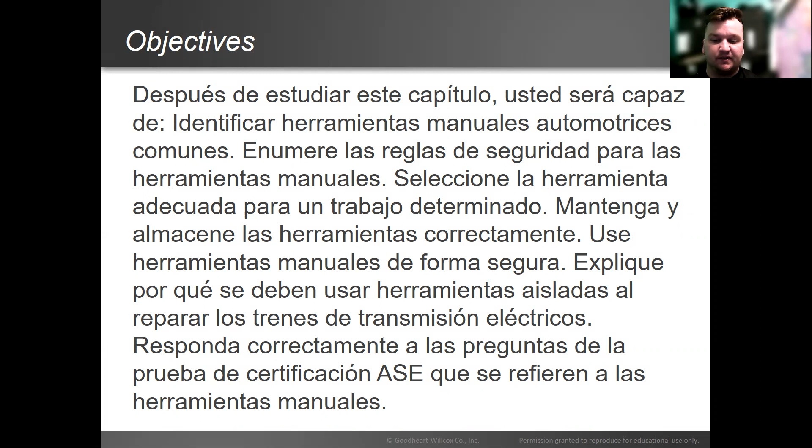So, some tool rules are to purchase quality tools, keep your tools organized, keep tools clean, and use the right tool for the job. You want to purchase quality tools because you don't want any tools to break while you're trying to use them. If they do, you run the risk of hurting yourself or damaging the parts or the vehicle you're working on.

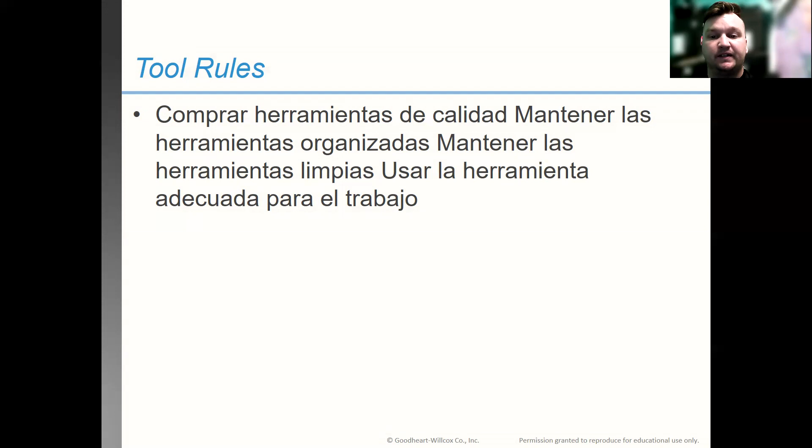You want to keep them organized so you're not tripping and falling over them when they're on the floor, and you don't want them in your pocket so they don't stick into you and injure you. Keep them clean so they're not greasy, so your hand doesn't slip off and you injure your hand. And use the right tool for the job so you're not damaging the things around you or possibly injuring yourself because you're using the improper tool.

All right, tool storage. A toolbox stores and protects tools not in use. There are 3 basic parts: a large roll-around cabinet, an upper tool chest, and a small carrying tray, so you can carry it around the shop.

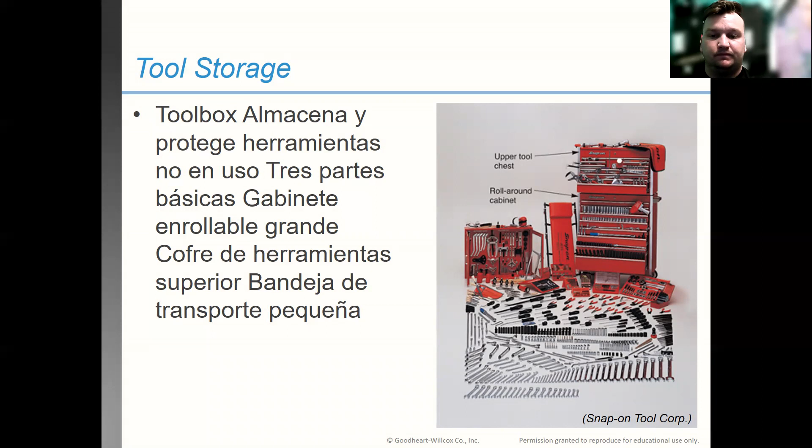Toolbox organization. Keep related tools in the same drawer. Do not keep small, delicate tools with heavy ones. You don't want your small tools getting damaged because a heavy tool crashed into it and broke it. And tool holders help organize small tools and provide portability. You're not always going to be working around your toolbox, so you might have to take the organizer where you're going, so you can be a little bit mobile inside the shop.

Wrenches are used to install and remove nuts and bolts. Wrench size is the measurement across the wrench jaws, stamped on the side of the wrench. It can be conventional, which is in inches, or metric, which is millimeters. Some conventional sizes do cross with metric, but not all of them. So don't think that you can use one or the other. You have to use that specific size for the bolt or nut.

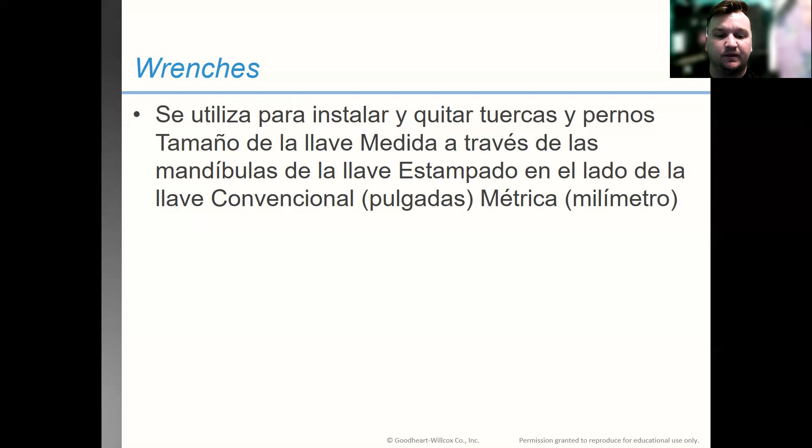All right, wrench safety. Always select the correct size. Never hammer on wrenches. When possible, pull, don't push. Never use a steel bar or pipe to increase leverage. So, again, use the right tool for the right job. You don't want to use the wrong size. You can slip off and injure yourself.

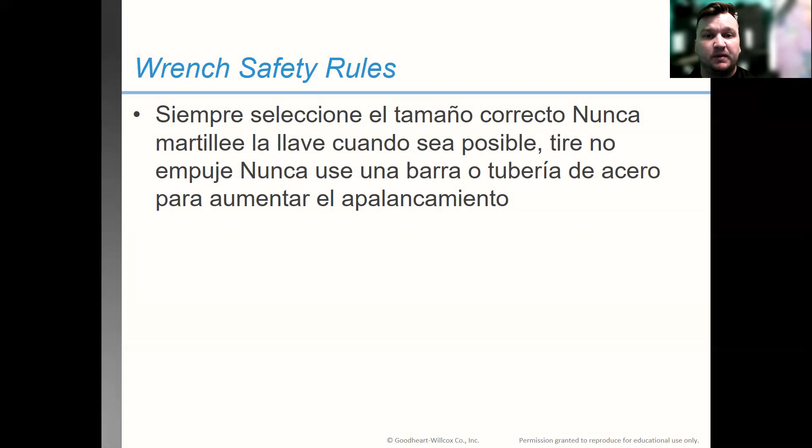You want to pull a wrench to you. Not every time you'll be able to, but try to make sure you're pulling it towards you. If you're pushing a wrench, when the bolt or nut breaks loose, you run the risk of hitting your hand on something and cutting yourself. And you don't want to use a pipe or a bar on a wrench to increase leverage. You run the risk of it slipping off or breaking that wrench.

All right, there's a few different types of wrenches. You have open end wrenches, which is the top picture there. You have box end wrenches, second from the top; you can see how it's fully enclosed. You have the combination wrench, a combination of the open end and the box end. You have a tubing or line wrench, also known as a flare nut wrench. It's almost a box end, but has a little cutout.

Brake line fittings have a line that runs through the fitting, so you have to get the wrench around the line. It has a cutout so the brake line or fuel line can go through it, but you still have the optimum amount of surface on the fitting to break it loose and keep it from rounding off. Those fittings are pretty soft and round off very easily, so you want as much surface area on that fitting as possible, and it fits very snugly.

And then you have your ratcheting wrench. This has a ratcheting mechanism on the box end, so that you can fit into tight spaces, and it kind of speeds up some work.

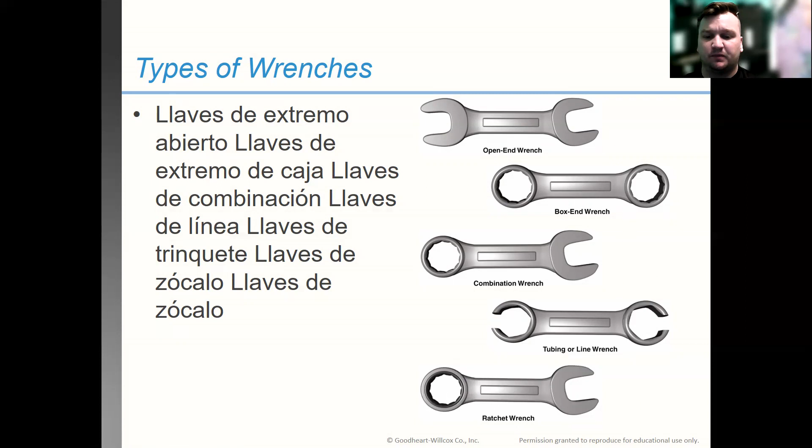All right, sockets, socket wrenches. Sockets are cylinder shaped. They're used to remove or install nuts and bolts. There's 4 different drive sizes and 4 different points. So if you look up here, you have your 4-point, and it's just how many corners there are.

So this is the side, whatever points it is, that's the side that's going to fit on the nut or the bolt. And you have 4-point, you have 8-point. You have a 6-point, you see 1, 2, 3, 4, 5, 6, and you have a 12-point all the way around. You want it to have as many points as the bolt that you're trying to take off. Now you can get away with a 6-point bolt and using the 12-point, but you can't use a 6-point socket on the 12-point bolt. So it only works one way.

Now the square side over here, these are called your drive sizes. This is what goes on the socket. So the smallest is a 1/4 inch. The next size up is your 3/8 inch. And then the next size up from that is a 1/2 inch. Those are your 3 most common sizes you're going to use, your 1/4 inch, 3/8, and 1/2 inch. Your 3/8 is going to be the most common one that you use.

You'll go up in sizes if you need more strength. If you have to put more torque on it, you'll want to use that 1/2 inch instead of 3/8. If it's something you're working on underneath the dash or a very small fastener, you're going to use the 1/4 inch. Those sockets are usually very small. You do have the 3/4 inch drive. So this is for very heavy duty trucks. If you're working on a school bus or something like that, that's when you're going to see that 3/4 inch drive size.

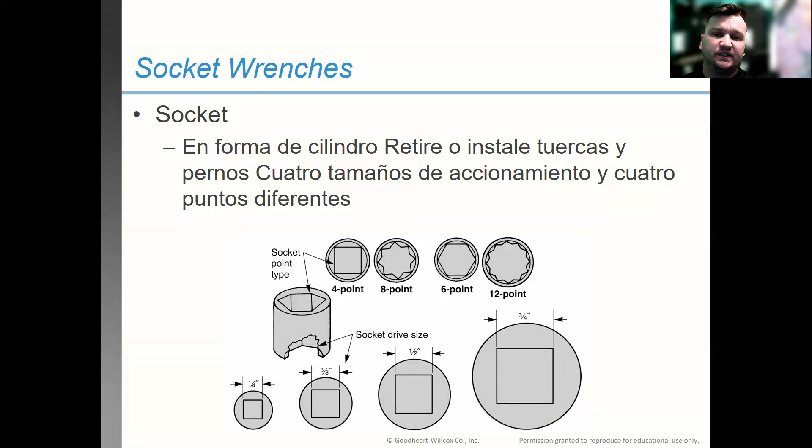All right, your socket wrenches, socket handles, they fit into that square opening in the top of the socket. Extensions can be used between the sockets and its handles to create length to make it easier to reach something if it's hard to get to. And universal joints, these swivel and let the socket wrench reach around obstructions. So if you got a part in the way, and you kind of have to get over and then down onto a socket, the universal allows it to bend and flex in that joint a little bit to get to that hard to reach fastener.

All right, other wrench types, you have adjustable wrenches or a crescent wrench. This has jaws that adjust to different head sizes. You have a pipe wrench. This is used to grab cylindrical objects. You have Allen wrenches, which is a hexagonal or a 6-sided shaft wrench. This is used for set screws on pulleys, gears, and knobs.

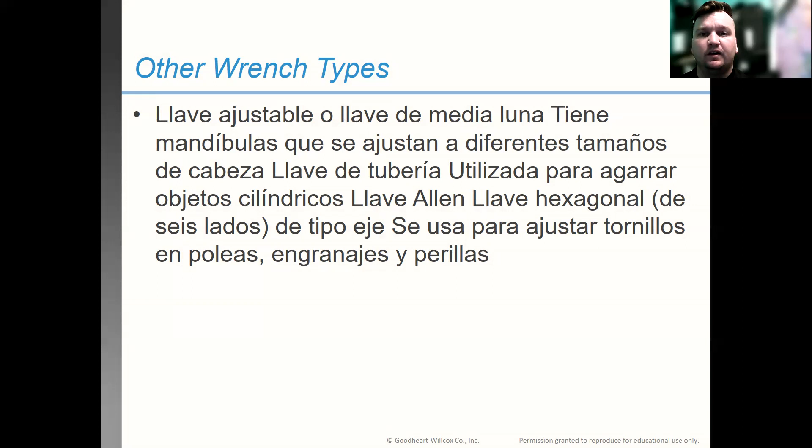So Allen wrenches kind of have an L shape. It's a 6-sided wrench that can fit on things. You also have Allen wrenches that can fit on your socket wrenches or your socket handles, your ratchets, if you need more leverage.

All right. Your next one is going to be your screwdrivers. These are used to remove or install screws. They come in many shapes and sizes. So starting with the top left up here, you have your standard. This is also known as a flathead. Next to it, to the right, you have the Phillips head. This is kind of a T shape. It comes to a point, but is a T shape. It has 4 crosses, and it also goes into a point.

Next, you have your Frearson. This looks very similar to your Phillips head. The only difference, if you look in here, you can see in the center of the crosses, it has a little raised spot. You can use Frearson on Phillips head screws sometimes, but you want to use the right tool for the job. You might end up rounding the screw out, but they look very similar.

Then down here at the bottom left, you have your Torx screwdriver. This has a star shape to it. And then your clutch screwdriver. This has an indentation on either side. This goes to very specific fasteners. You don't really see them very often in the automotive industry, but they are out there.

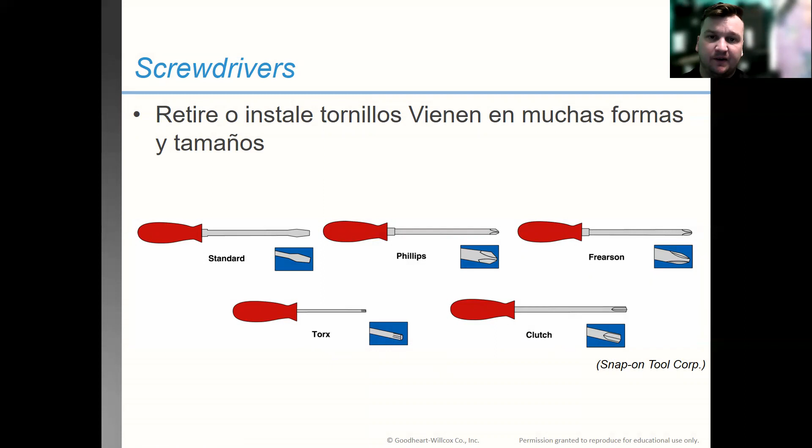All right. Screwdrivers continued. Offset and stubby screwdrivers are used in tight places. So stubby screwdrivers are very short screwdrivers, so you can fit them into places.

Offset screwdrivers are an L-shaped screwdriver. That way you can fit it into a very tight space and be able to turn that screw. Starting screwdrivers will hold the screw until it is started. A scratch awl has a sharp pointed tip. It's like a pick, so it's used for marking surfaces. If you have to mark something to drill it or whatever, you use the awl to scratch it into it.

Right, and an impact driver. This is used to loosen extremely tight screws. An impact driver is a screwdriver with a very large mechanical handle. When you put it on the screw, you will hit it with a hammer, and it will force its way into the screw, which gives it a little bit more pressure and keeps it from rounding off.

But as it gets forced into it, the mechanism also will turn the bit slightly to turn the screw. So it's a very useful tool. It works very well. You will use those out in the real world. Use them a lot for brakes on certain vehicles.

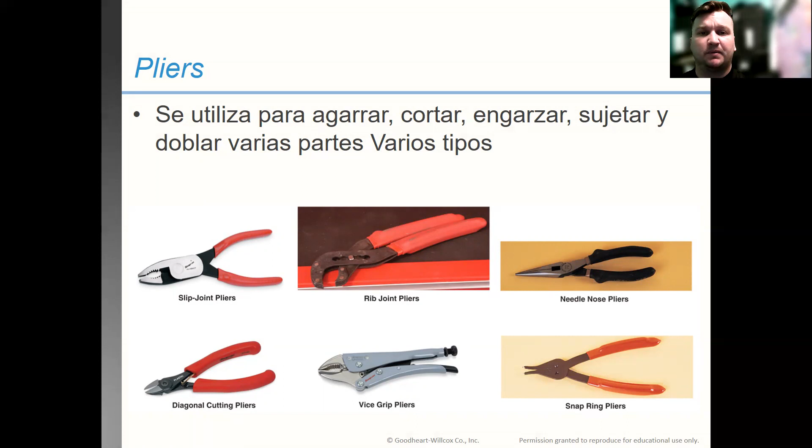So safety rules: you want to select the right size hammer. Always check the hammer head is tight on the handle. Use brass, plastic, or a dead blow hammer on parts that may be damaged using a steel hammer. Grasp the hammer near the end of the handle and strike squarely. Make sure you're not hitting the hammer sideways or anything. You're hitting it flat and square.

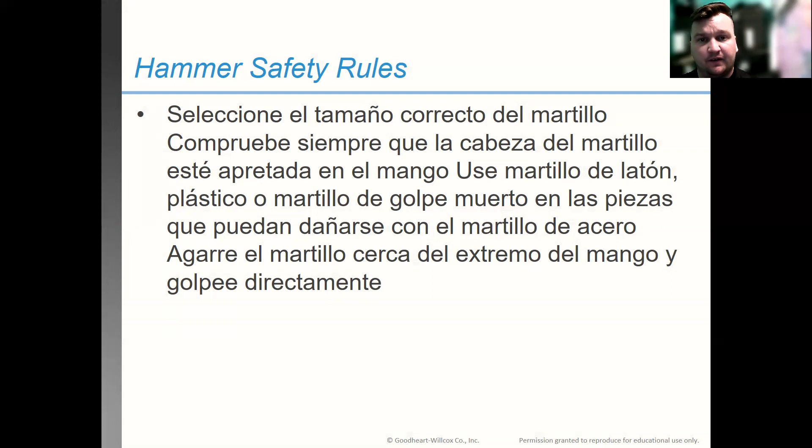Also, do not strike two hammers together. The metal on the hammer is a hardened steel that can chip, and when they chip, they're very sharp, and it can get in your eye. It can cut you. It can injure you. So do not hammer two hammers together. That's a big no-no.

All right, so punches, I was getting a little ahead of myself earlier. Punch types: your center punch is used to mark parts for reassembly or starting holes before drilling. Center punch has a sharp end on it. You'll put it where you want the center of the hole, or the center of where you're drilling, and you'll tap it with a hammer. This will make a little indentation, so the point of the drill bit will not walk or wander around on the part. It will stay where it needs to be.

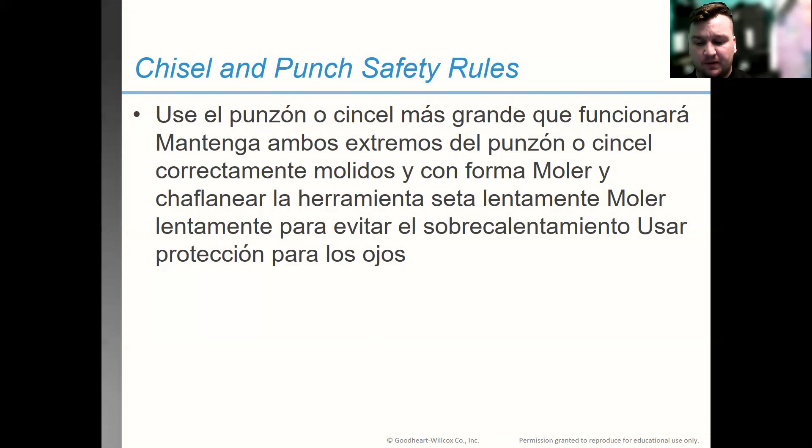You also want to chamfer it. So you'll kind of want to angle it in. So you want the end where you're striking kind of angled inward and then flat on the top. Grind slowly to avoid overheating, and wear eye protection. Anytime you do something, you should be wearing eye protection anyway.

So, file safety rules. You will never want to use a file without the handle securely attached. Apply pressure only on the forward stroke. You're only cutting with the file on the forward stroke. When you pull it back, it's not cutting anything. So place one hand on the file and the other on the file tip. Do not file too rapidly. Clean a clogged file with a file card or wire brush. And never hammer or pry on a file. It is a file, not a pry bar.

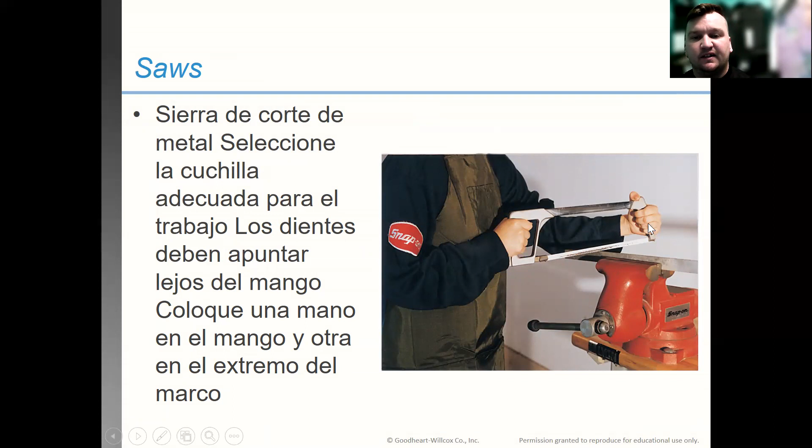Saws. Hacksaws are used for cutting metal. Select the appropriate blade for the job. Teeth should point away from the handle. Place one hand on the handle and the other on the frame. So you can see in this picture how he is holding it. That's how you should be holding it when you use a hacksaw.

Holding tools. You have a vise. This holds parts during cutting, drilling, hammering, and pressing operations. These are bolted down on our workbenches. Vise caps or wood blocks can be used to prevent damage to delicate parts in the vise. C-clamp.

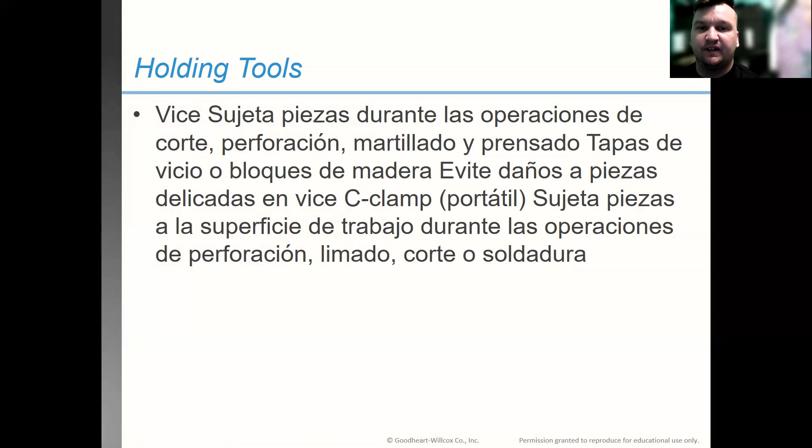These are portable. These hold parts to the work surface during drilling, filing, cutting, or welding, or anything like that. Never hammer on the vise handle. Keep moving parts clean and oiled. Wear safety glasses. Be careful not to damage parts in the jaw. And use your vise caps if you have them and if you need them.

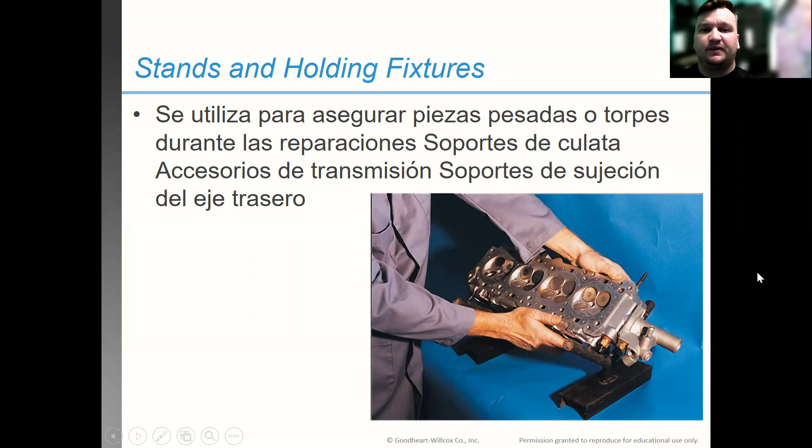Stands and holding fixtures are used to secure heavy or clumsy parts during repairs, such as cylinder heads, transmission fixtures, and rear axle holding stands. So here's a picture here. This is a cylinder head. He's got it in a holding stand. That way he can work on it. It's kind of an awkward shape. It has different things sticking out from it. So you can't really just have it sitting on the bench sometimes when you're trying to work on it.

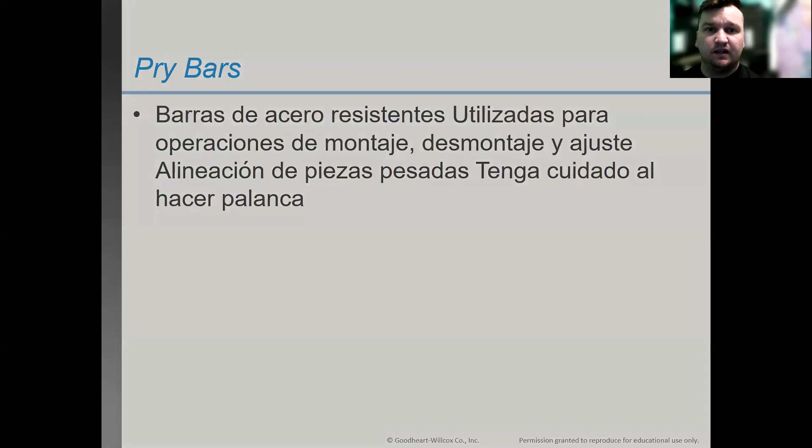If you're prying on something and it doesn't really want to give, double check and make sure you have all your fasteners removed. Maybe check your service manual. There might be a hidden fastener somewhere you didn't see, and that's holding you up. If you pry hard enough and you haven't removed it, you risk damaging that part you're prying against.

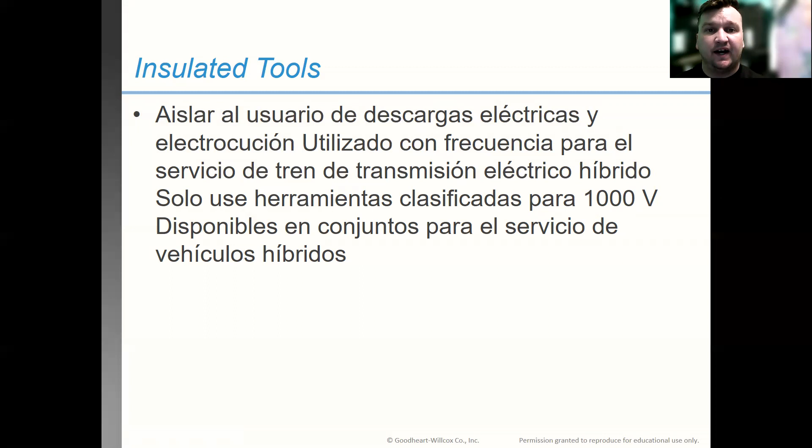All right, insulated tools. Insulated tools insulate the user from electrical shock and electrocution. Frequently used for hybrid drive vehicles or electric vehicles. Use tools that are rated for 1,000 volts. That's a lot of voltage. Available in sets for hybrid vehicle service. So these are coated. Usually these tools are bright orange. They have some type of ceramic coating on them. They're very heavily insulated to handle that 1,000 volts. You'll want to use these when you're working on hybrids or electric vehicles, especially when you're working on the batteries.

Insulated tools can be insulated wrenches, electrician pliers, high voltage pliers, plastic pliers, graphite, and high voltage screwdrivers. So, like I said, every tool has some type of high voltage version. That way, you can work on those hybrid vehicles, because it would be completely silly if they didn't make tools to make it safe to work on those things. So they have tools to do that. All right. So that's the end of this slide.